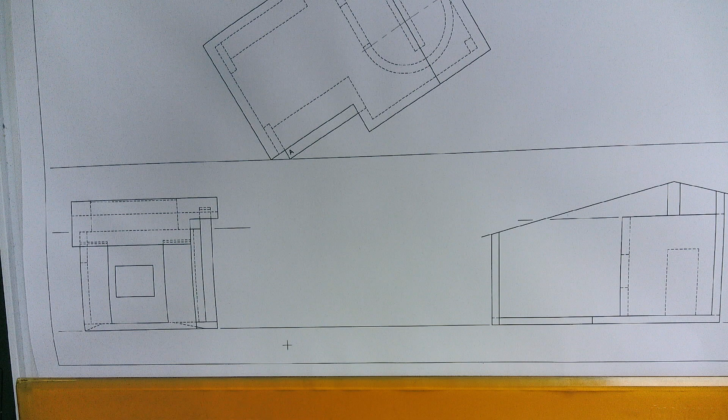Grade 12s, almost called you grade 10s. Let's have a quick look. Nice little 2-point perspective at 30 degrees and 60. This was a DBE Final, 2023 I think it was.

So, just doing my vanishing points at 60, 30. Okay. It is hidden detail there. I'm going to just darken it, and I've already got it darkened there.

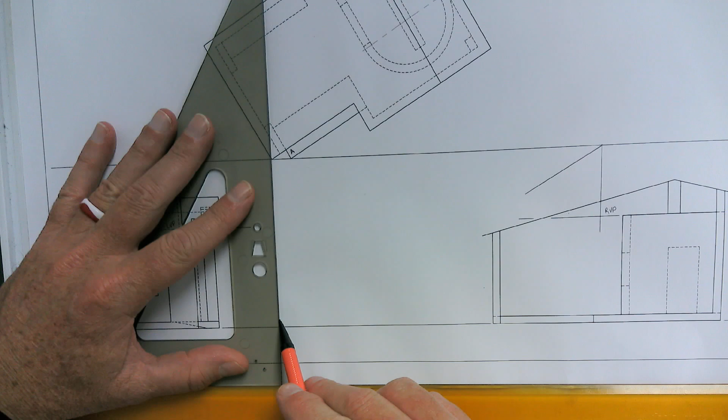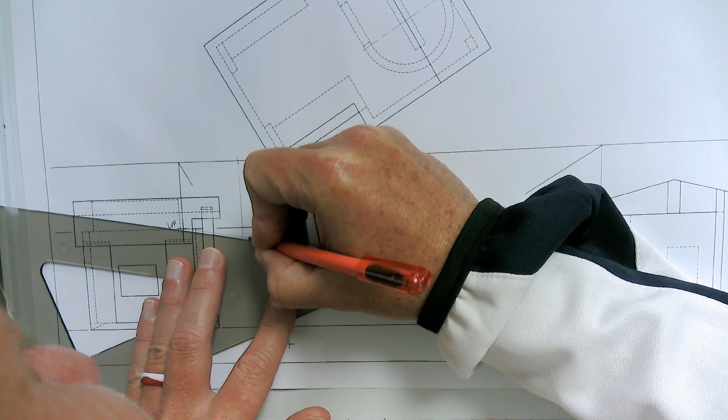RVP, LVP. Okay, what I am going to do, this is my roof here, so I'm going to bring it down lightly, and I'm going to bring the height of my roof to it, and I'm going to take that to my left. Bring this corner of my roof. Okay, that there is my roof.

I'm going to bring my step down, and I'm going to take my, well, it's not really a step, it's more of a ramp. I'm going to take it to my left, and I'm going to take it to my right.

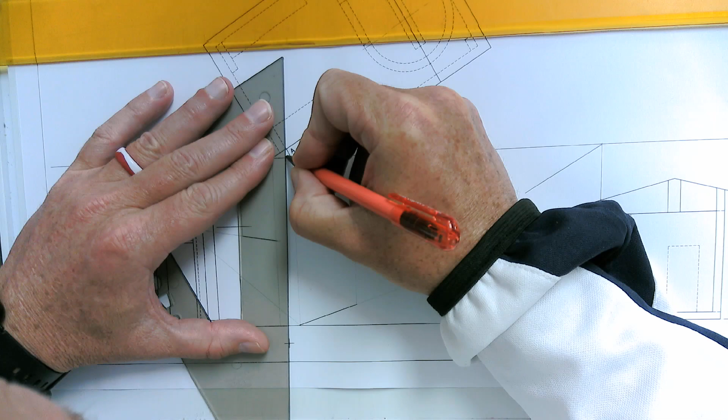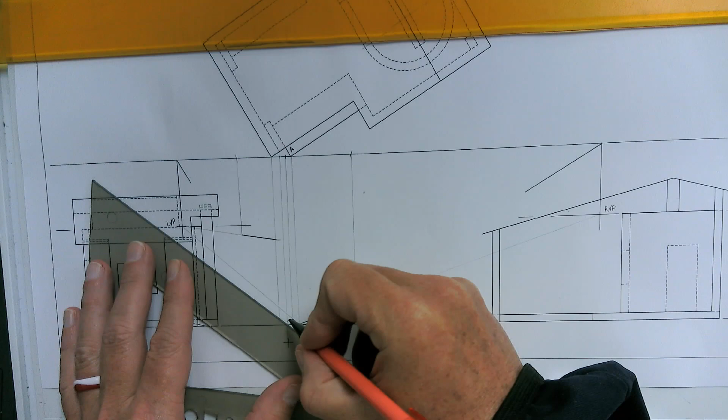What I'm doing is I'm bringing those two walls down. And that is just giving me that portion there.

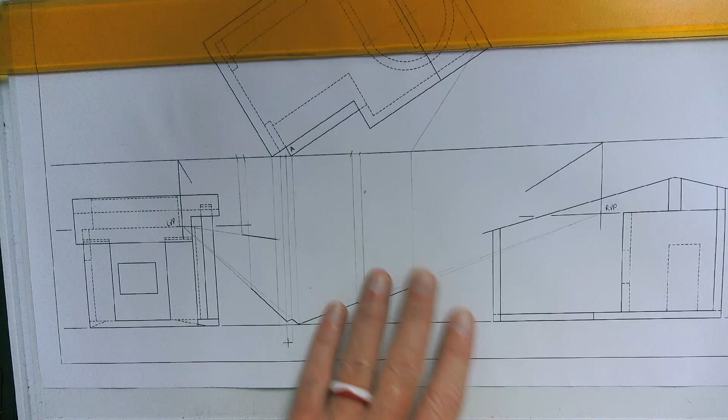Okay, so that just gives me the bottom bit nicely going through and so forth. Okay.

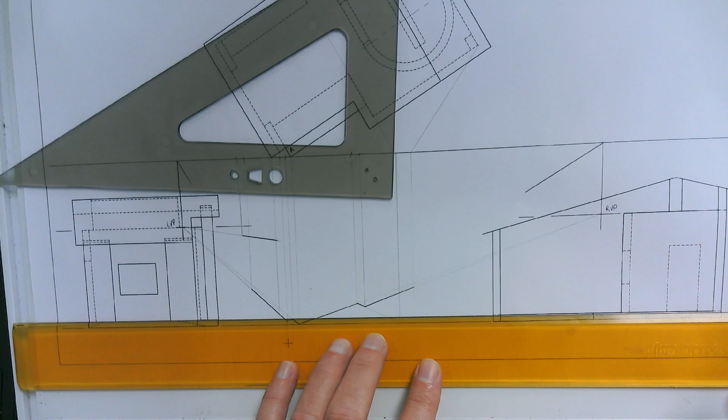What you'll see, that and that is all in line, so just bringing that down. And I'm actually going to bring the height of everything to it. And then that, of course, is going to go to my left.

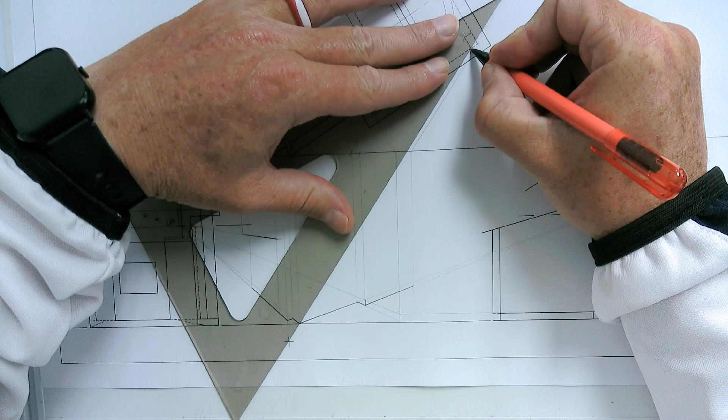Okay, that point and that point lines up nicely. So I'm going to just bring this little piece over.

So I've darkened that. That, of course, is going back there. But I want to work on my steps here quickly. The steps and the ramp.

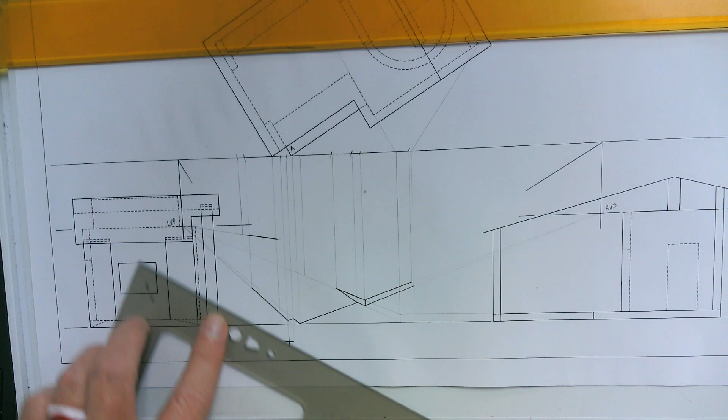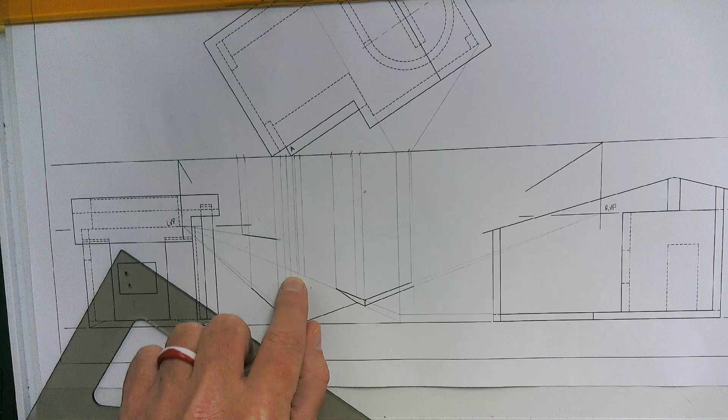Okay, all that basically is because over here this is going to come across, so that's going to just come down to give me a little bit of the back ramp.

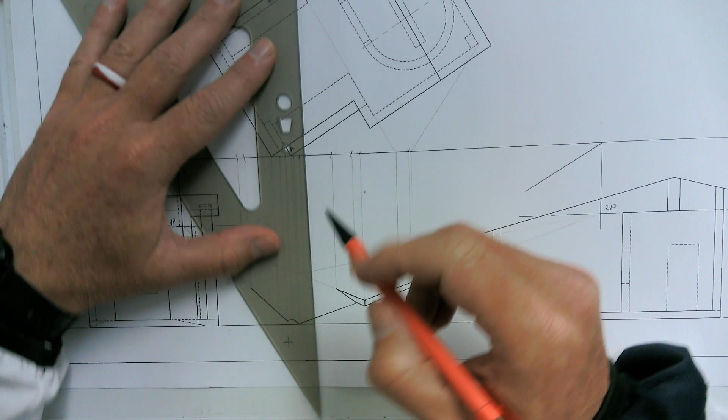Okay, again you can see that wall there because it lines up to there. Just darkening that little bit, and darkening that little bit.

I'm going to come and finish this portion here now.

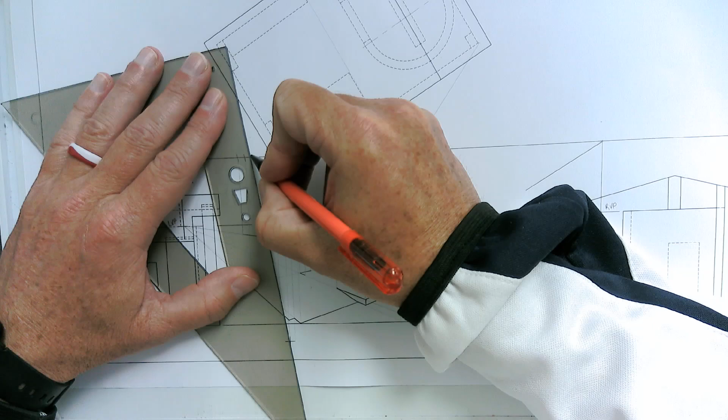What I can do, so I was going to show you, I can bring that across there, or if you have a look, that is also in line with that.

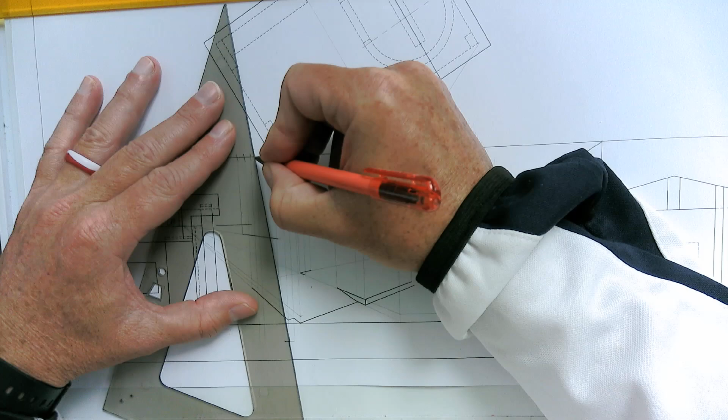So if you remember, my step is there, so I'm going to take this lightly back, and if you remember, just to show you, I brought this line down, so where it meets there,

that gives me that little portion there, and then that gives you that little bit there.

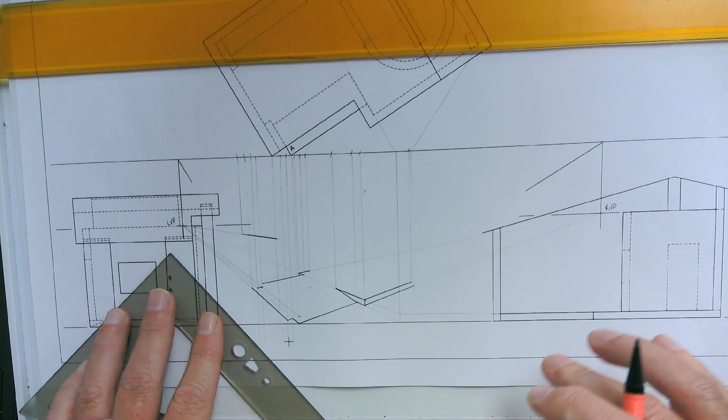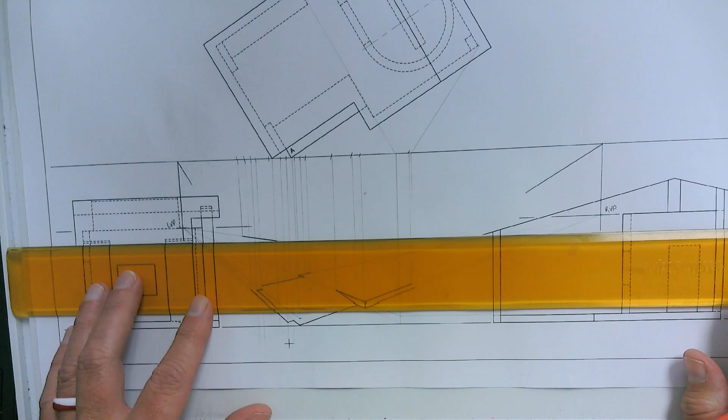Okay, have my step going there. Now I'm going to start with all this part to get it going nicely. So remember, I've got my roof going up to there. So my roof is going to come this way and so forth. But I'm going to start putting in these dark pieces here.

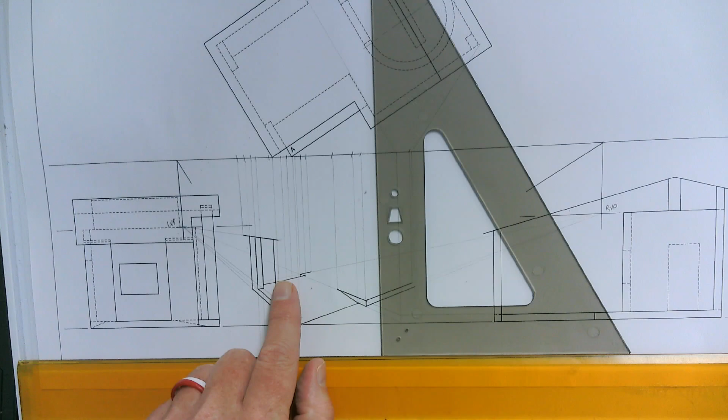Yeah, I am going to erase a little bit of that now. I actually forgot that that part does do that, and there's this piece and all of that that's hidden there. So I will do that in a few seconds.

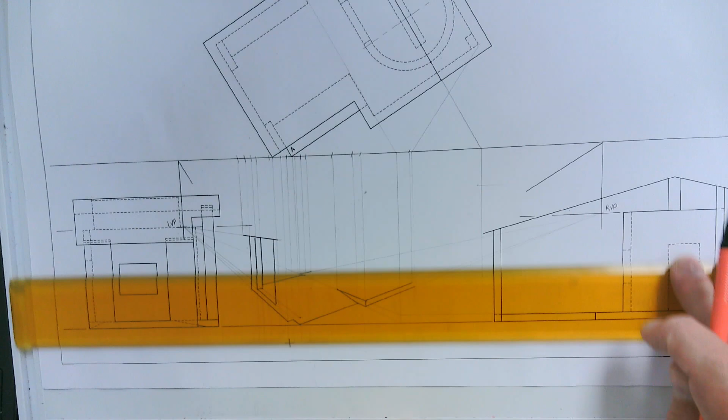Sometimes by making your lines dark too early, you can sometimes have to erase, but for the purpose of the video, that is why I do it.

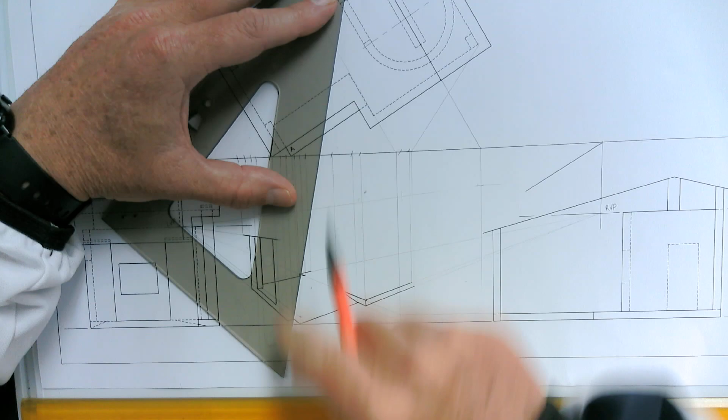Okay, so that is that portion of the roof going.

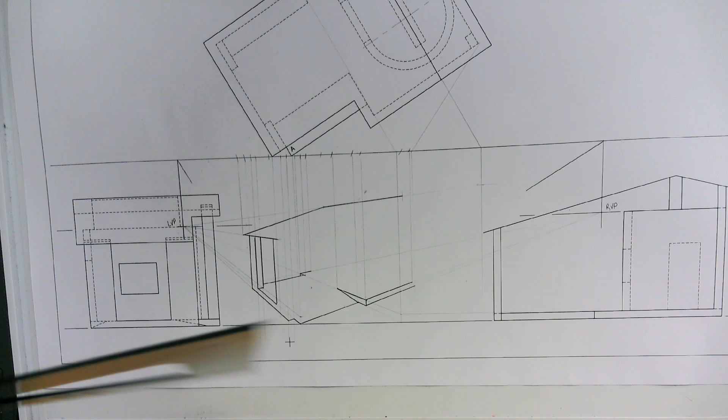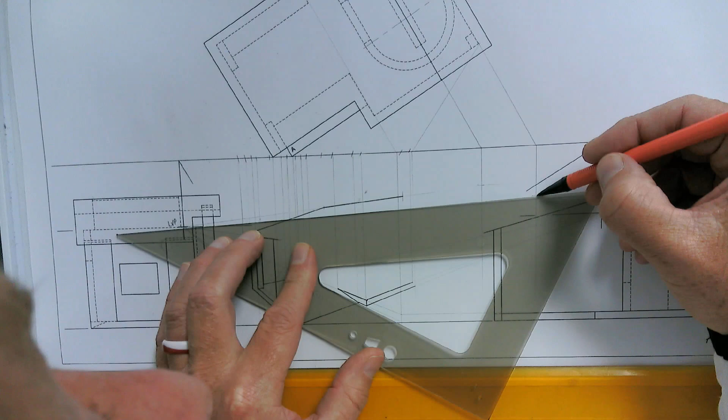Okay, here what I'm basically doing is just bringing my wall, because my wall needs a bit of, so my wall goes up there a bit.

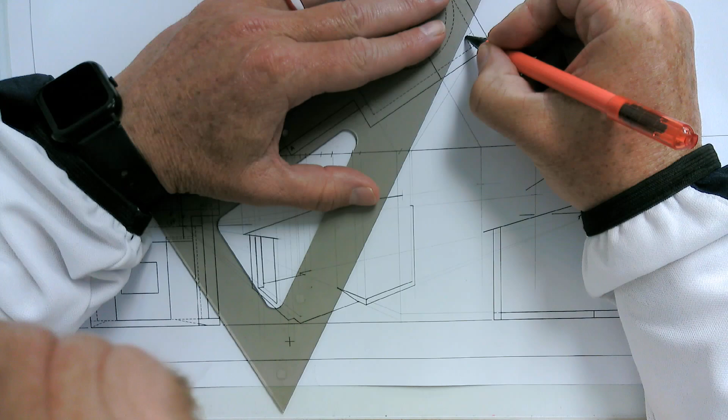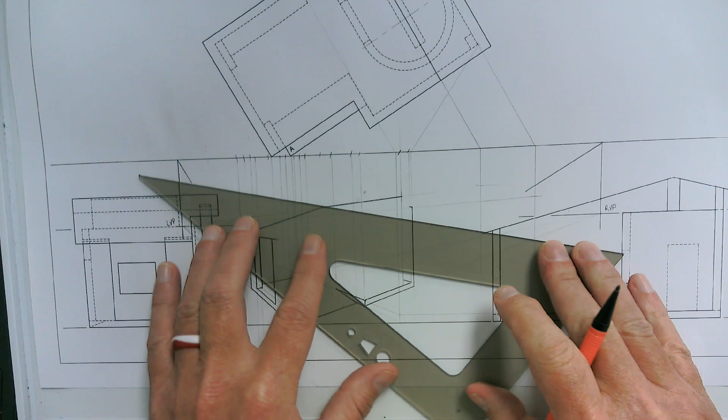Okay, now remember, that wall went to my left, so I lined it up this way. Now this one I'm going to just line up this way.

Okay. Now what I am going to do, just erase some of my construction just to help so we can see what's going on.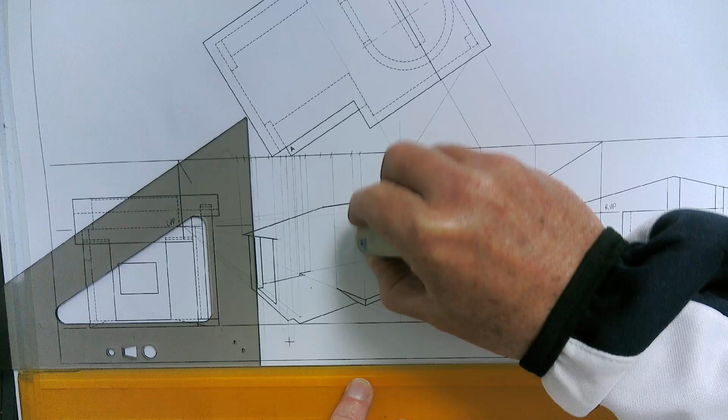Again, I will repeat, if your teacher doesn't want you to neaten it up a little bit, please don't. Remember, please listen to your teacher, stuff like that. It is important. I'm just doing it so you can see it and you can make out what is going on.

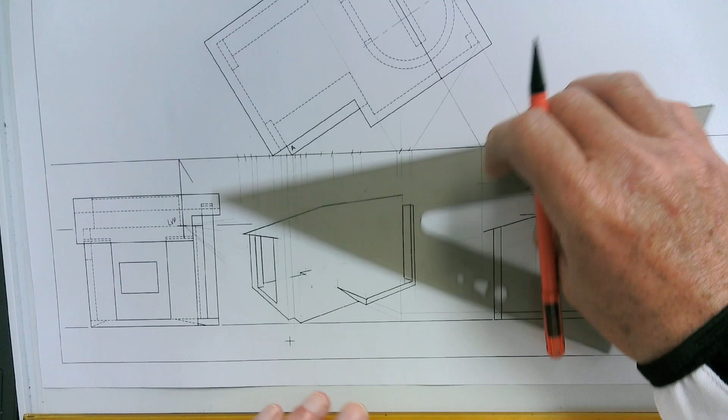And what you will see, I've just drawn those two construction lines going up, and that's why I've just erased that little bit of the wall, because you're not going to see it behind those lines.

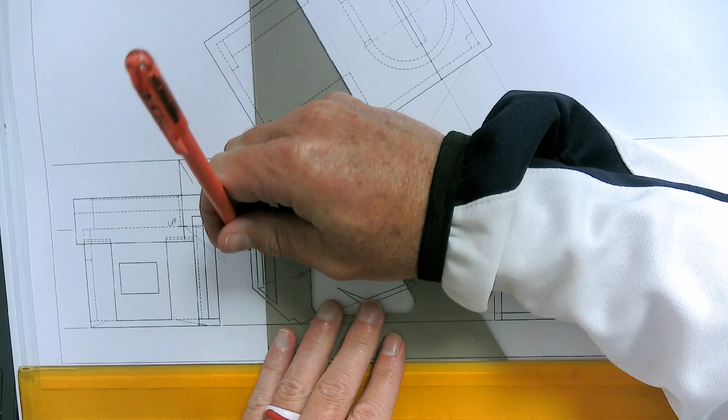Okay, let's get cracking again. Ooh, I've erased a little bit of this line, let's just put it back in. Okay, let's do my roof. So I'm going to bring my roof down, and you can see that's the height of my roof, so I'm going to touch.

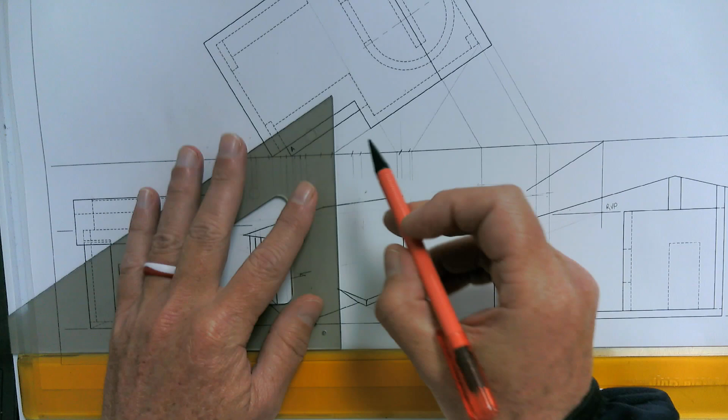Another way I could have done my roof, because this is a straight line, could have brought it down that way, touched there, and taken that to my right. So that's just a different way of doing it, let me show you quickly. So as you can see, touches. Now if I take that portion to my right, you can see it's the exact same line.

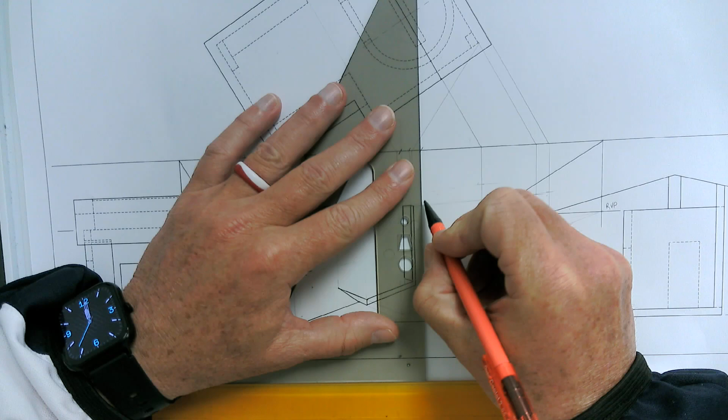So I'm going to bring this piece down, so there we can see that is that point of my roof. I'm going to bring that up. I am going to draw a line here and a line going through there.

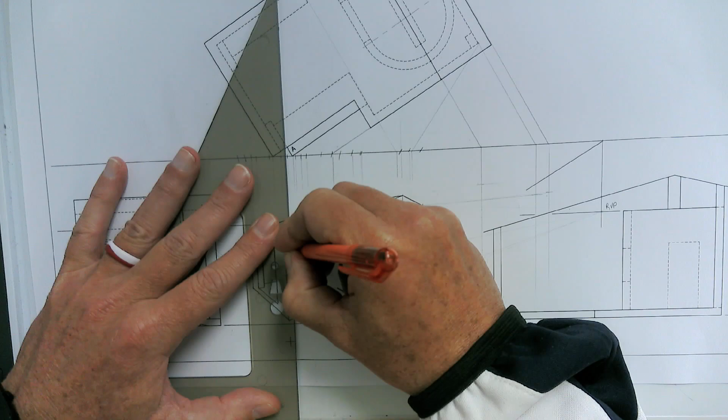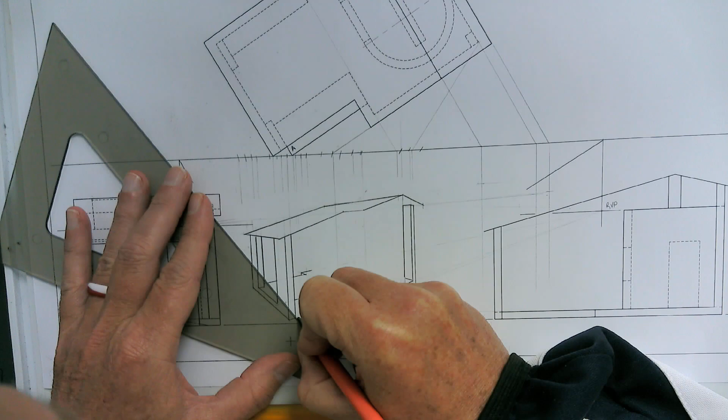Okay, those are all those pieces. Now what I am going to do, I'm going to line this up dark. I am going to carry on with a bit lighter because I need this point here purely just to help me get the little incline, just to get that little bit going.

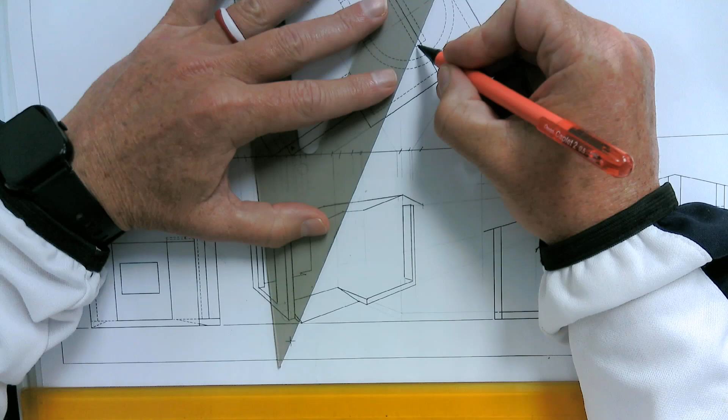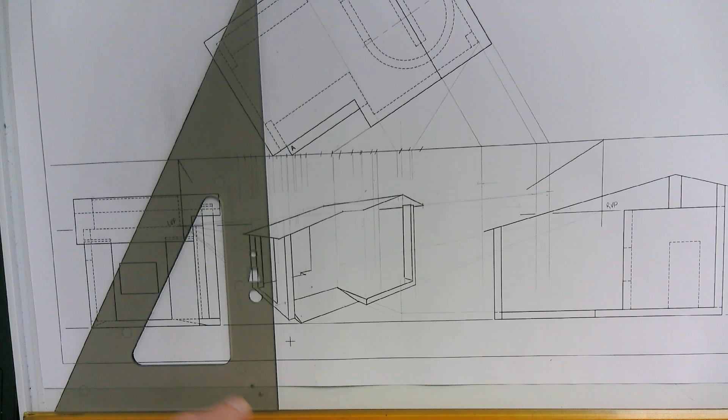Okay, there. Let's bring these two lines here quickly. It's going to be that little line going through there. You'll see it's just off.

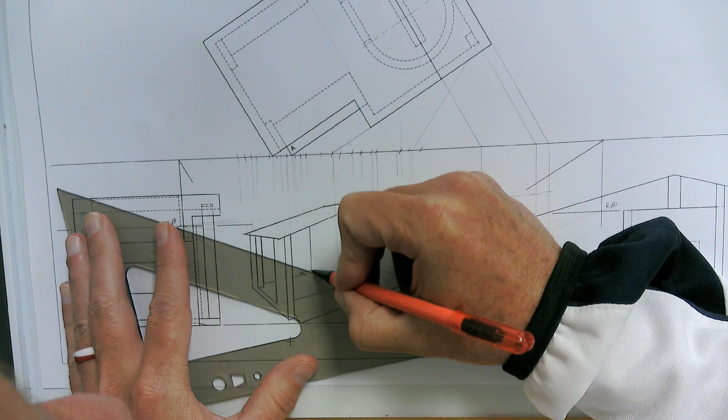Okay, now I'm going to bring this point here, and that's going to come up to here. Please notice your window is just short of the center line. Don't think it touches the center line, please.

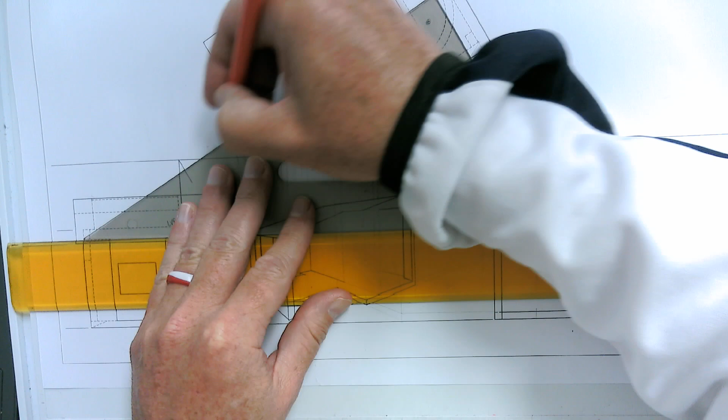I've got that coming there now. What I am going to do, I'm going to bring my window. There's the bottom of my window, top of my window.

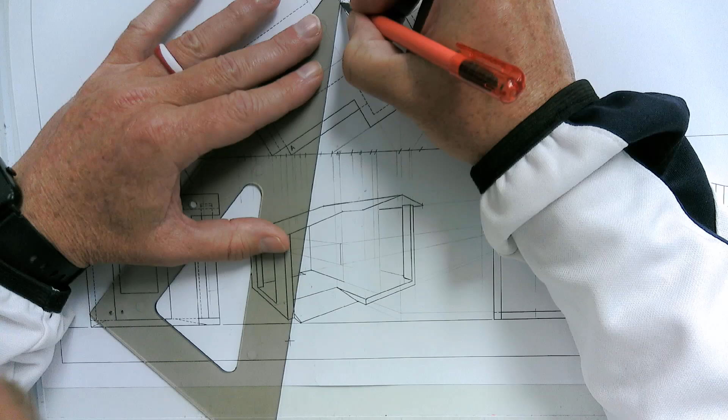Yeah, 17 minutes, it's not too bad, still got my circle to do. Again, perspective drawing in the exams, you should be looking around about 40 minutes. Remember, I am talking while I am drawing, so that might slow it down just a little bit, but not too much. So you want to be working around about 40 minutes.

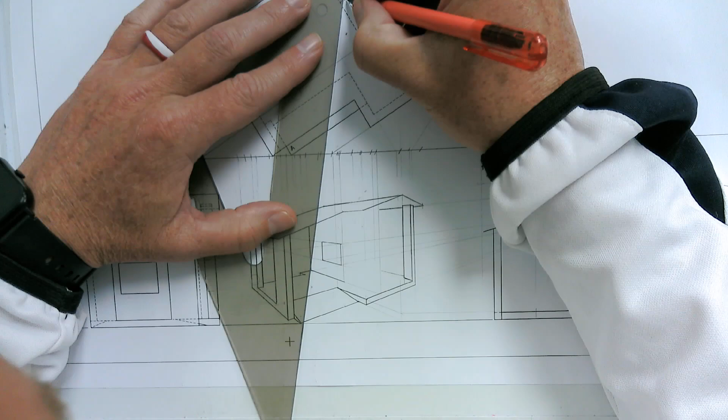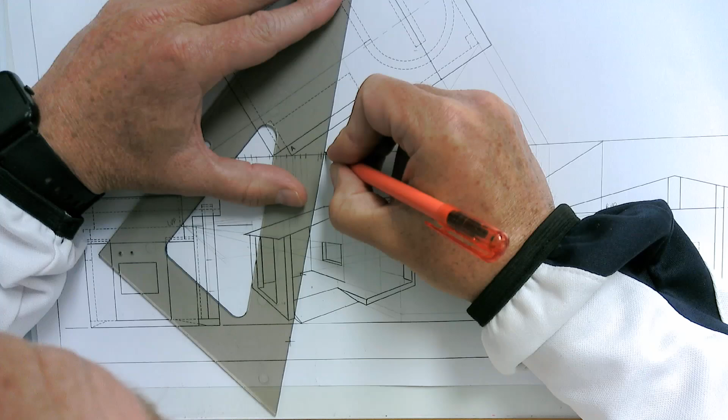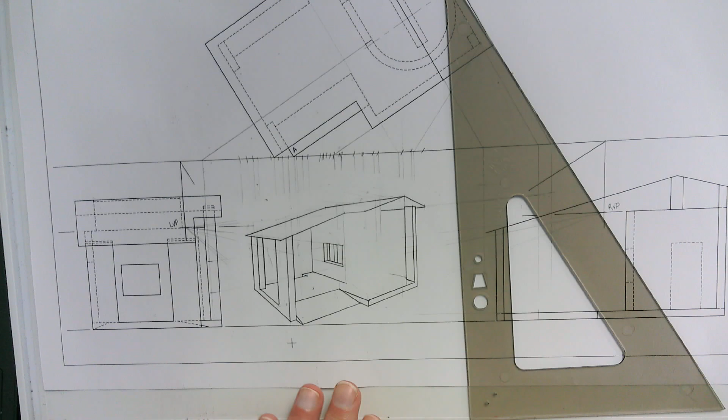Again, I just want to neaten up again some of the construction lines. Okay, I'm going to see those lines there. Again, just neaten up here a little bit more.

Okay, now we can come along and do my circle. So, remember, 30 degrees. So from here, I'm going to 60 degree it, and I'm going to take it across there, and that would give me my other angle.

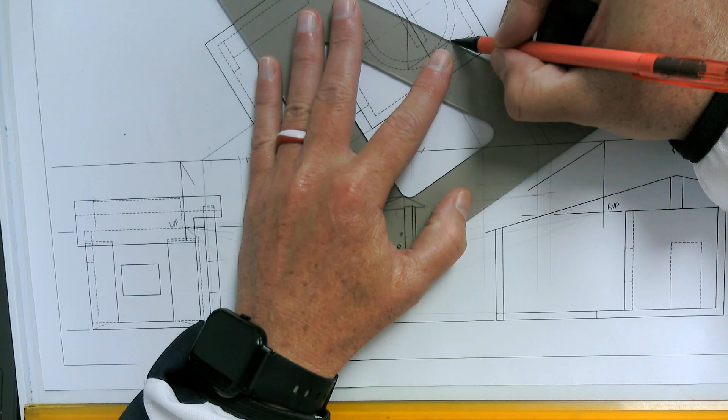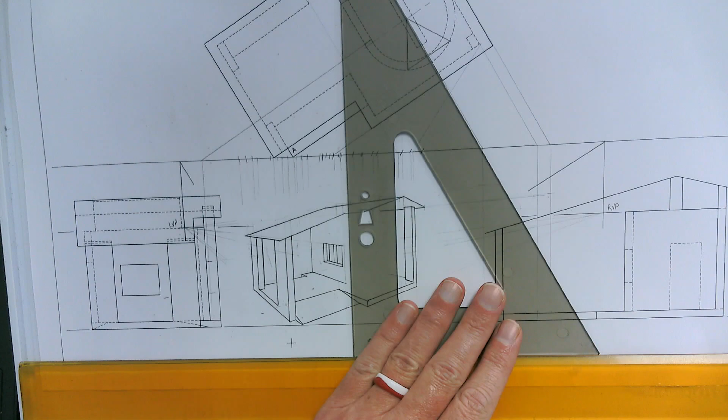Now remember, 90 degrees, 60 degrees, we've done that one. Now if I flip over, see, I've got that one. So remember, that's your 90 degrees. That's your, okay, so check what I'm going to do. Flip it over. Now, I'm not going to need that one because of the curve, but it's always good just to put it in. Okay, so now what I'm going to do.

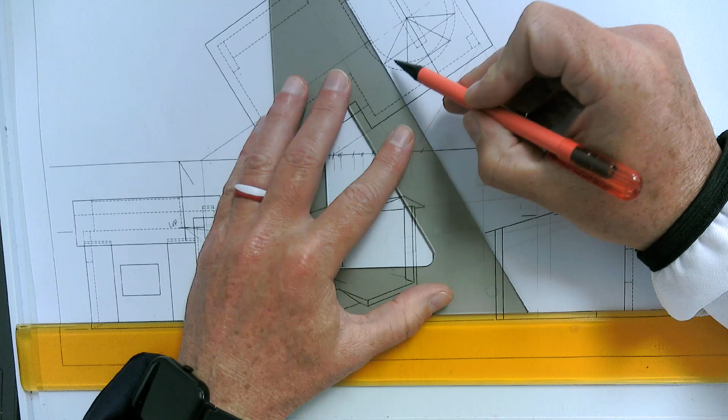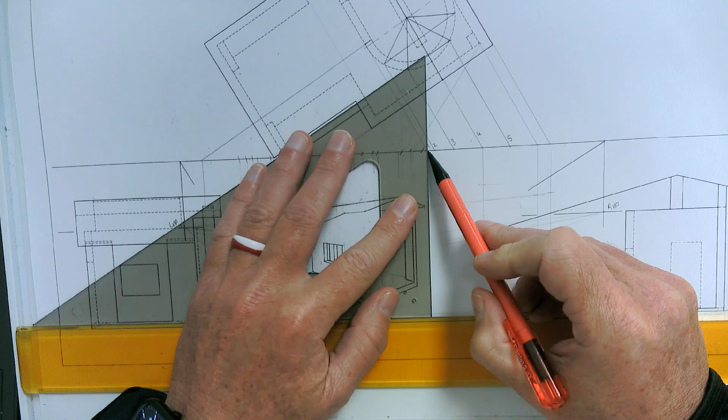1, 2, 3, I've already got 4, and I'm going to probably need 5. Okay, so we bring down 1, we bring down 2, 3, 4's already down, now we're going to bring down 5. Okay, if we have a look, it's all on the horizontal line.

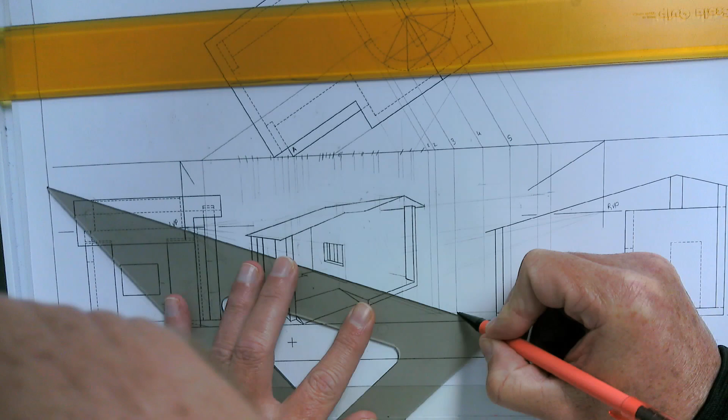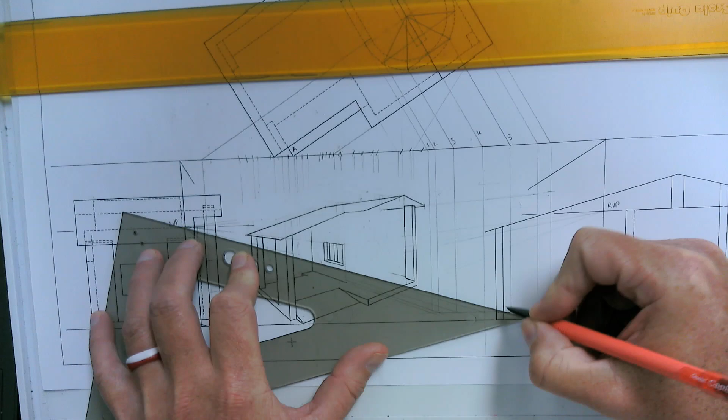So I'm taking 1, 2, 3, 4's just short, 4, and there's 5.

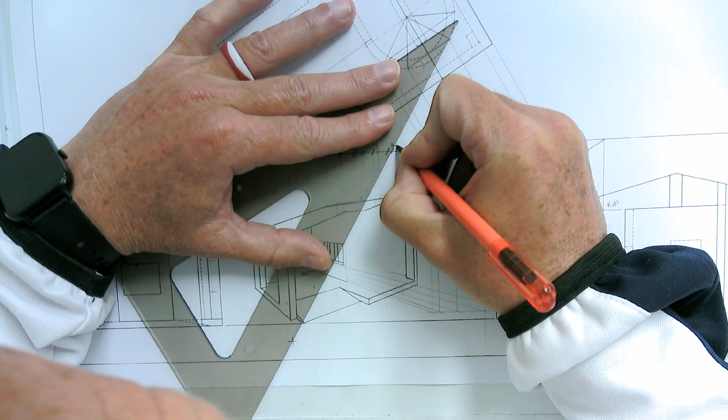One, 2, 3, 4, 5. So 1, 2, 3, 4, and 5.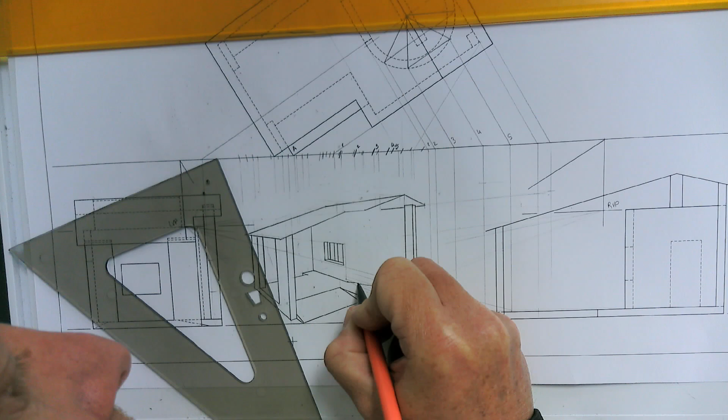Again, what I said the other day, I just come here and I draw it in lightly first, and then I can come and do it dark. Okay, remember, this is on your horizontal. So I've taken that up.

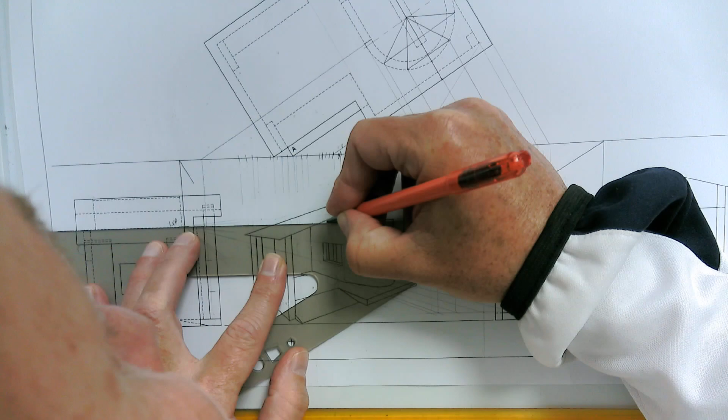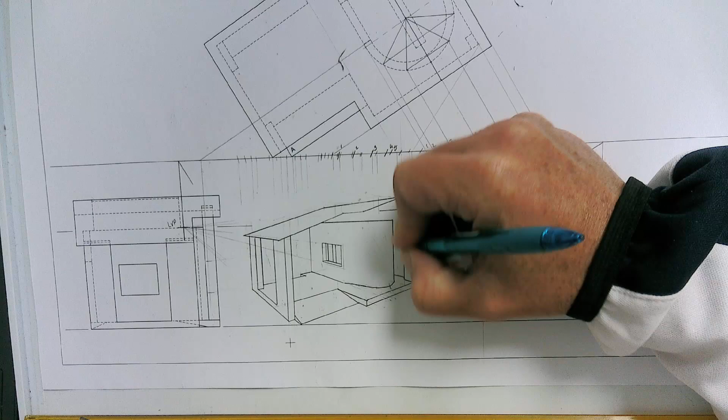I'm going to use my small eraser just to neaten up here.

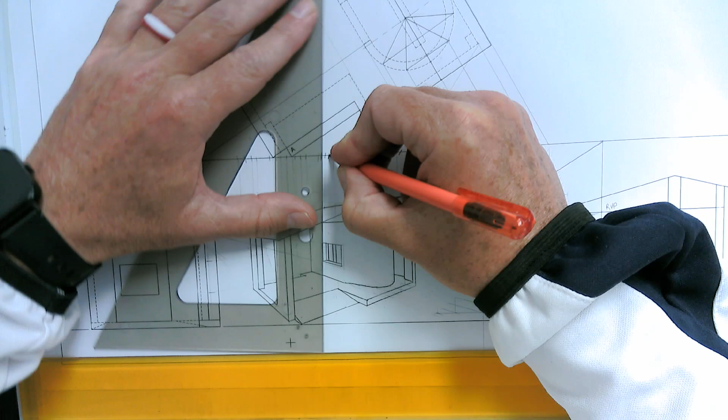See, I've got those two lines. And then, remember I brought this side down earlier. Remember? There it was there. I've got it over there. So I've got my roof going into there. That would join onto that line there, so I don't have to stress. And nicely done.